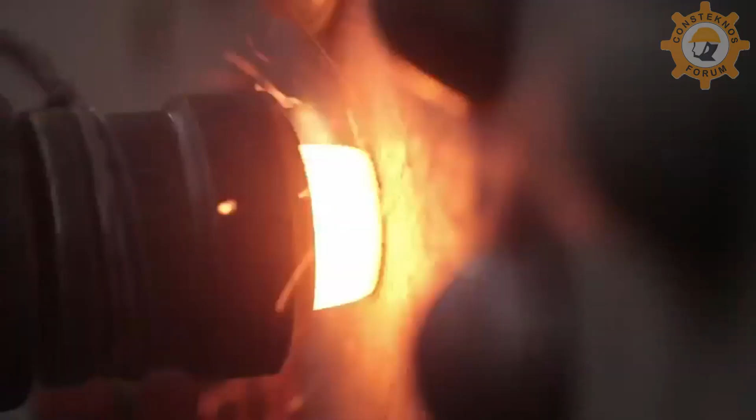But for any change to happen, you need a vision fueled by an ambition. Because everything happens twice, first in the mind and then in the world outside.

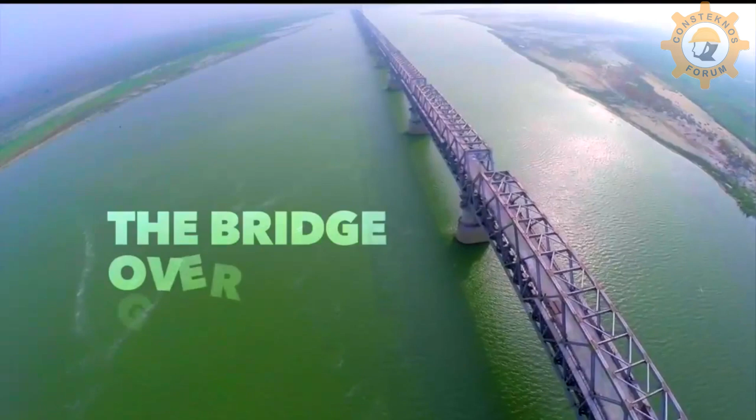The river Ganga, ancient, revered and sacred. Originating from the Himalayas, it reaches the plains, flowing merrily as it meanders its way through the Gangetic plains. By the time it reaches Bihar, the Ganges basin has extended to about 700,000 square kilometers, and the river becomes a white giant that separates the state in two.

With passage of time, this divide has led to an unequal distribution of resources and opportunities in the state of Bihar. For economic potential to be tapped to the fullest, the need to bridge this divide has become critical.

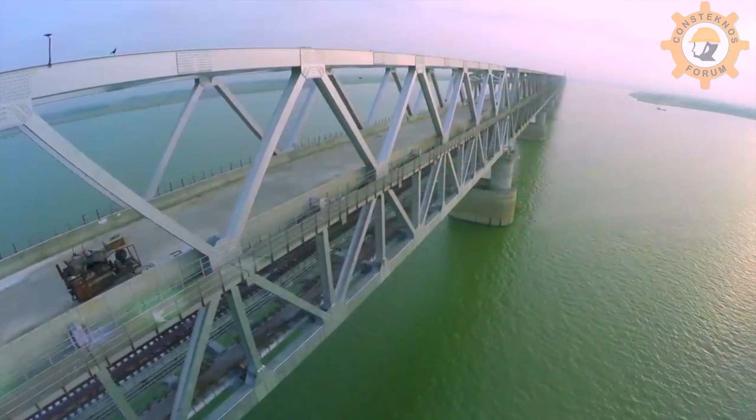IRCON was associated with this bridge in June 2008 when the Ministry of Railways awarded this work to IRCON, and since then there have been various developments over a time span of about 7 years, and now we are seeing the end of the work and commissioning of the railway line, which is going to link the southern part of Bihar across the river Ganga to northern Bihar.

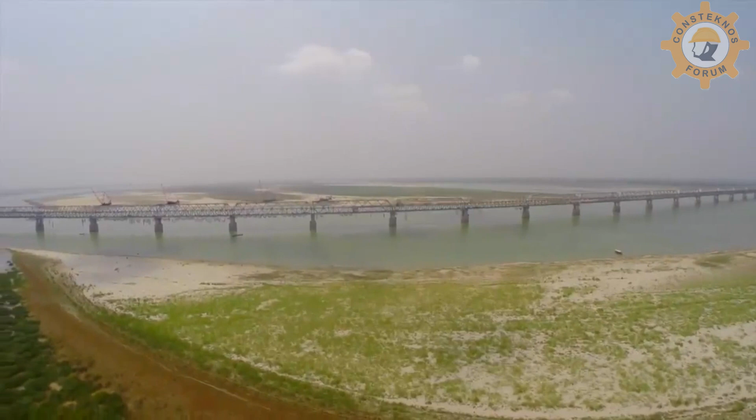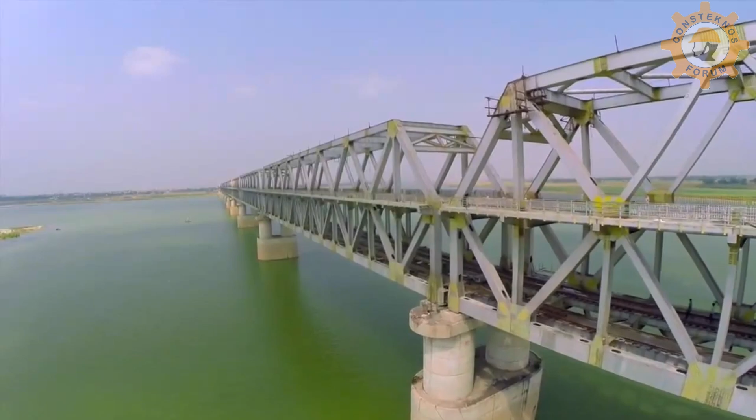36 spans of 123 meters along with 2 shore spans of 64 meters each, with 2,200 tons of steel in each of these spans and 100,000 rivets. This is the longest and the heaviest superstructure on Indian Railways.

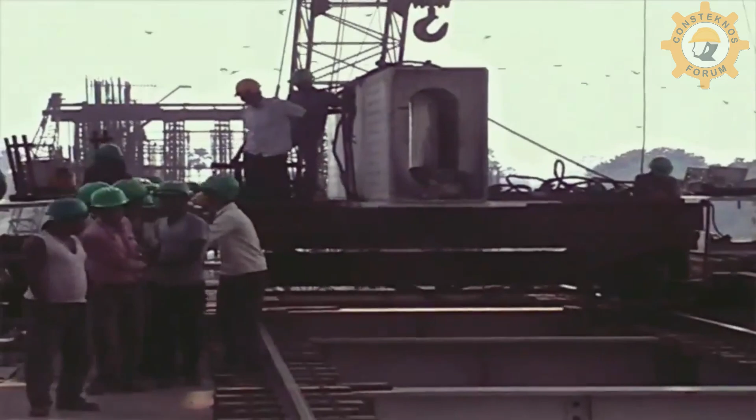The erection of the superstructure started in September 2010. Floodplains were reclaimed with boulders and earth filling to construct the first anchor span. And within a span of 4.5 years, all 36 spans of 80,000 metric tons of steel were mounted over River Ganga. This 4.56 kilometer bridge is Indian Railways' longest truss bridge.

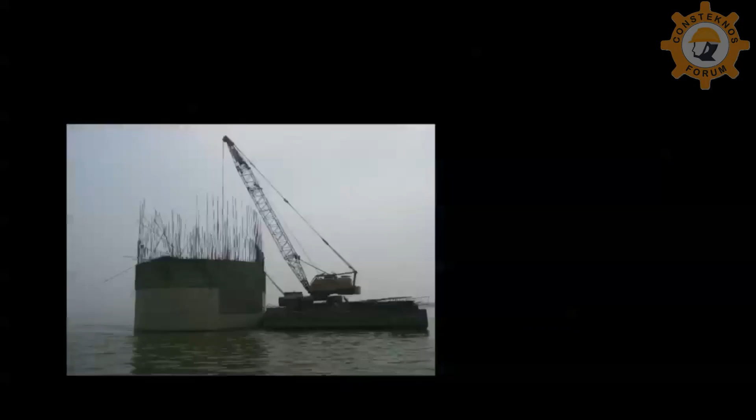The foundation laying had already begun in 2002. It was decided by the ministry to add a roadway above the railway track. By that time, the foundation and the substructure were already complete.

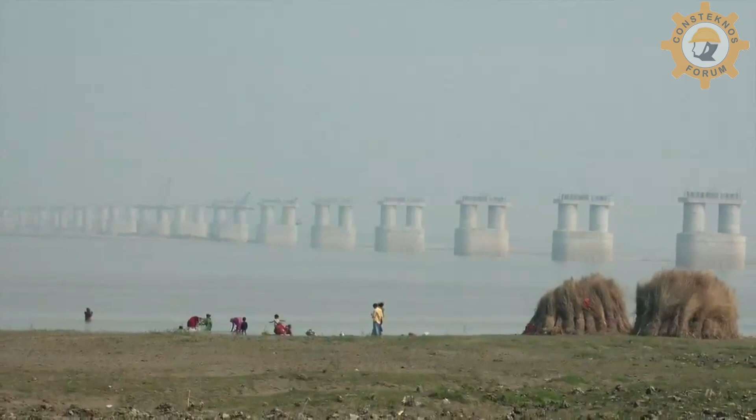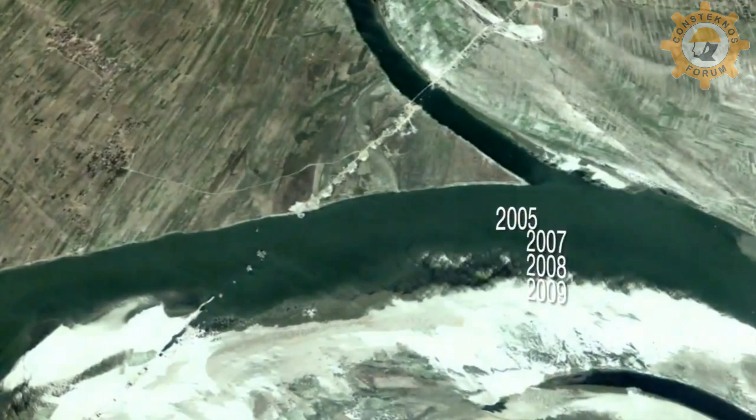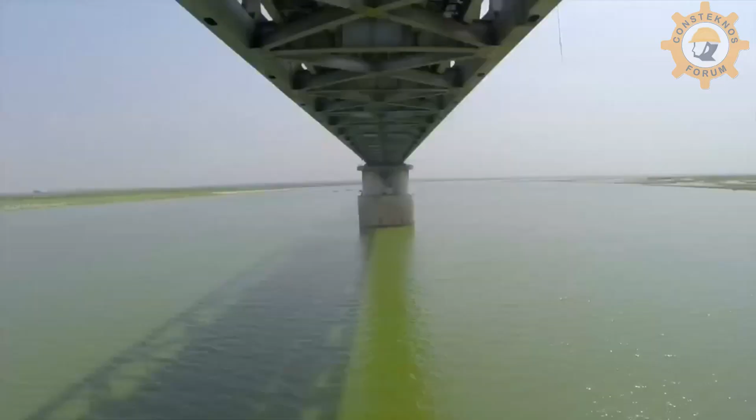This is the foundation portion, which is in the shape of a well, and the well is like this, in the shape of a double D. We have twin circular piers of outer diameter 5.5 meter, having concrete thickness of 0.8 meter. Now the founding level is -8, so the total depth is almost 60.5 meter, which is equivalent to a 17-story building.

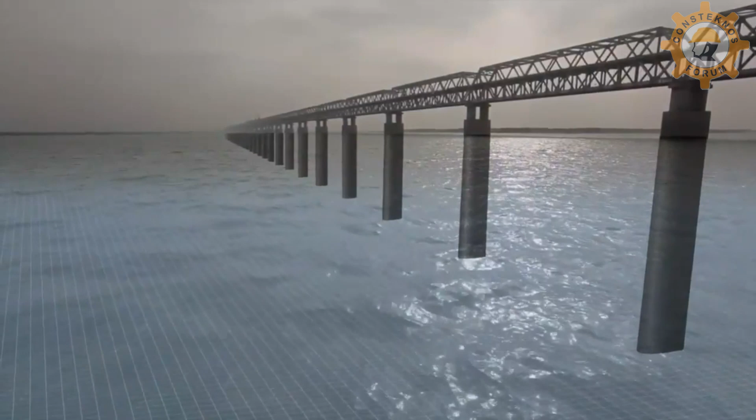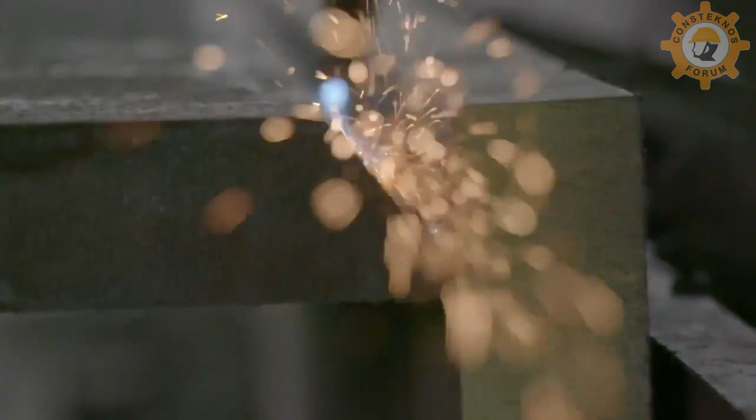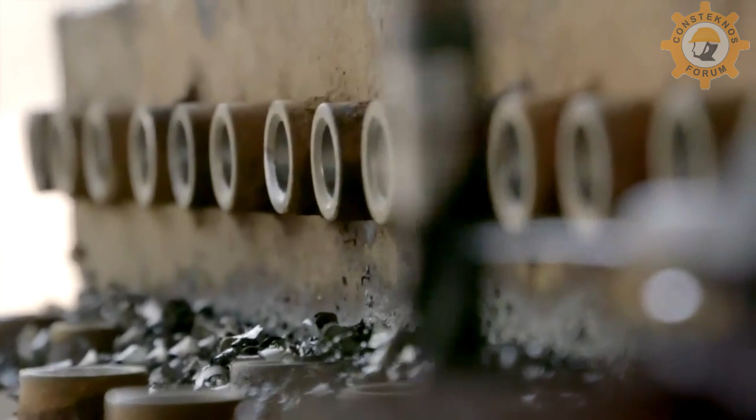To optimize the steel work, we had to go for a higher grade of steel, E450, so that the overall tonnage of the steel could be reduced and the dead weight of the superstructure could be reduced. But nonetheless, we had to use members as thick as 62 millimeters. Fabrication with 2.5-inch steel plate was itself a task. Special radial drills and guide jigs become essential when numerous identical drill holes are needed in large numbers. The drill needs to be precise and absolutely correct in position.

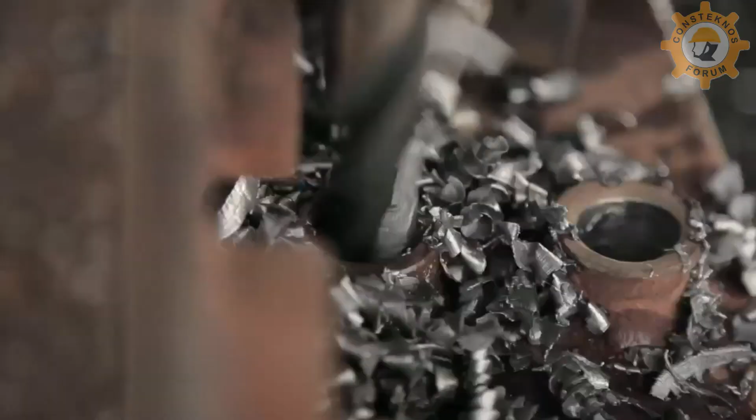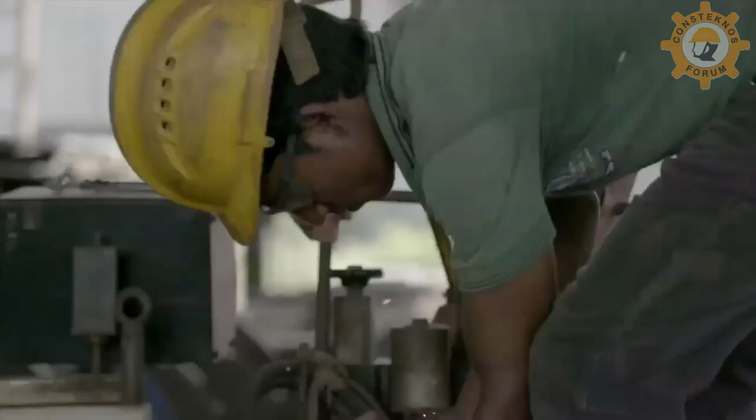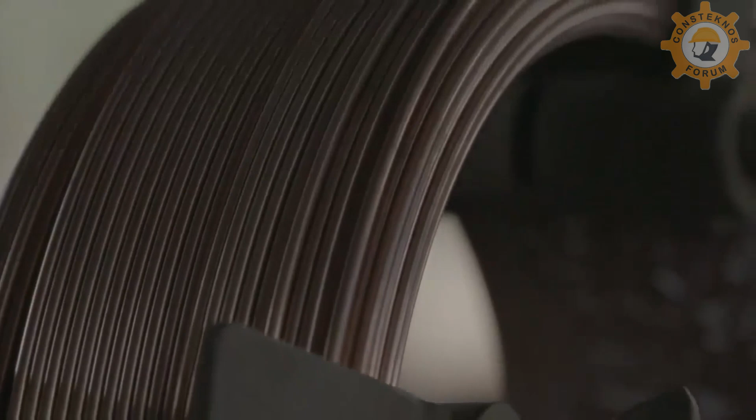Once drilled, these plates will become part of a bigger steel component of the bridge superstructure. Then, these plates are welded to form a member of the steel truss. A special welding technique, submerged arc welding, is being implemented. It involves formation of an arc between a continuously fed bare wire electrode and the workpiece. The process uses a flux to generate protective gases and to add alloying elements to the weld pool. When molten, the flux becomes conductive and provides a current path between the electrode and the workpiece.

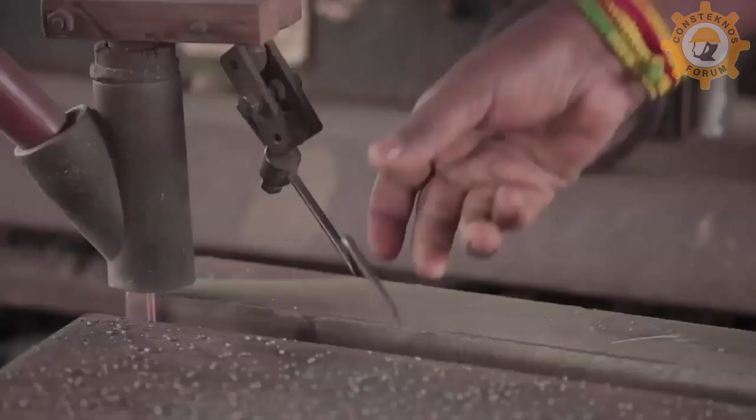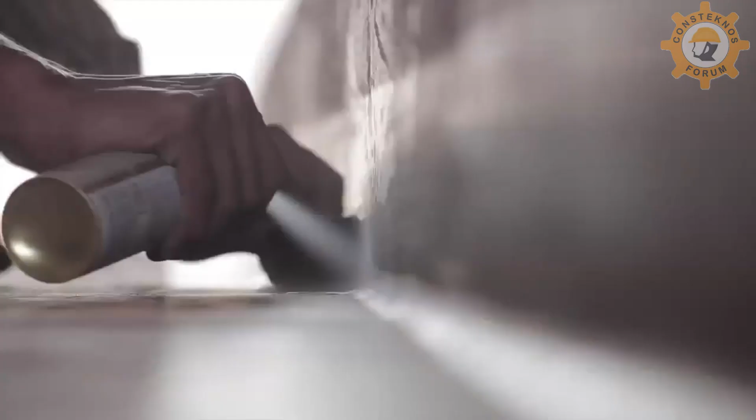The molten weld and the arc zone are submerged under a granular fusible flux consisting of lime, silica, manganese oxide, calcium fluoride, and other compounds. This prevents any atmospheric contamination. Since the operator cannot observe the weld pool, great reliance must be placed on parameter setting and positioning of the filler wire. As the arc is completely covered by the flux layer, heat loss is low. There is no visible arc light, the welding is spatter-free, and there is no need for fume extraction. Once the steel is welded, it is thoroughly checked for perfection by dye-penetrant testing. Here the white color shows the weld is seamless.

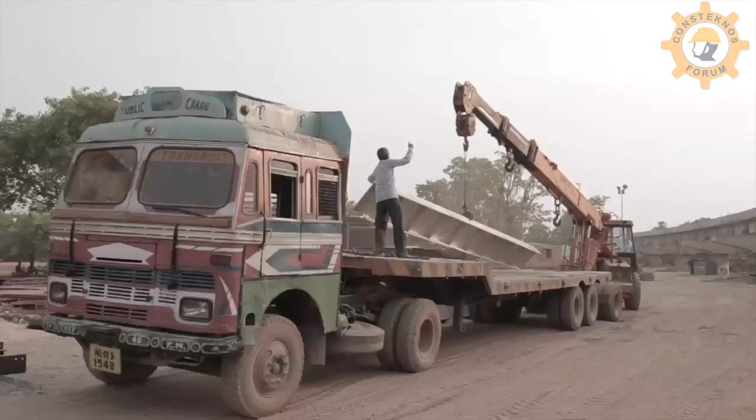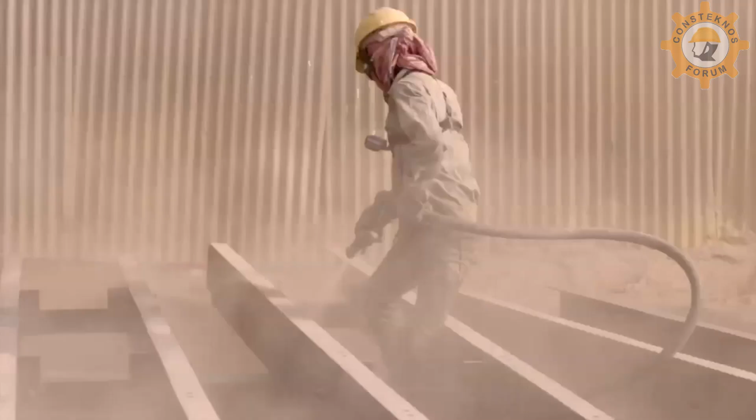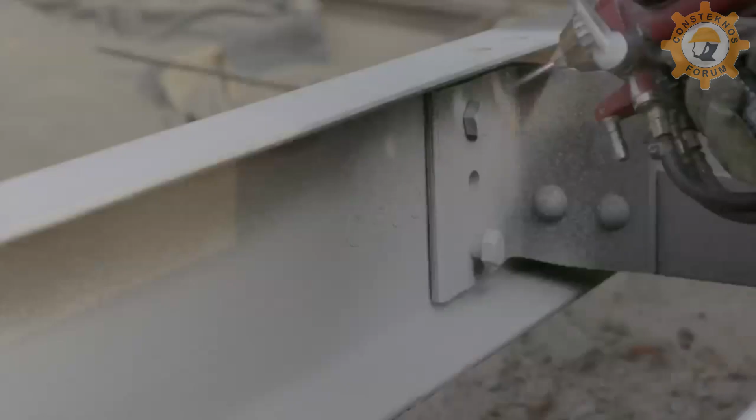The prefabricated steel components are then sandblasted and metallized. Sandblasting involves propelling very fine bits of sand at high velocity to clean the steel surface. Once sandblasted, the steel is metallized with a coat of aluminium. This will provide environment and corrosion protection to the steel for decades.

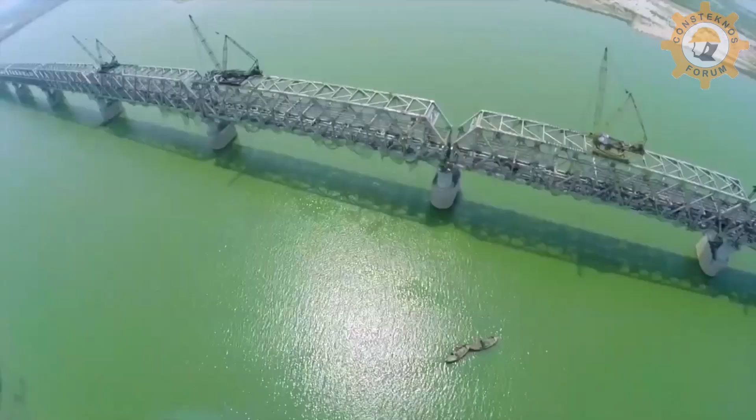The steel truss cantilever bridge was a major engineering breakthrough when first put into practice. It can span distances over 460 meters and can be more efficiently constructed at difficult locations by virtue of using little or no structural reinforcements. The construction begins with one span on ground. This serves as the anchor span for cantilever cranes mounted on top of the steel superstructure.

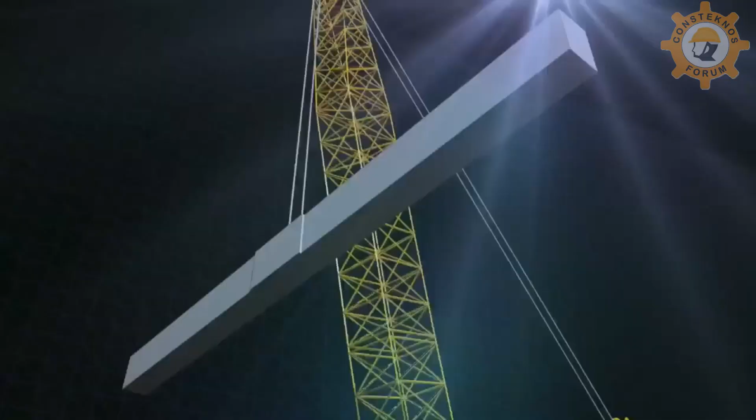Supported by a link member which holds the free end, these cranes build the next span member by member, launching ahead without any other propping from the ground. The cranes move on top, along the truss structure, adding one member at a time, forming an entire span from the free end, and land on the next pier.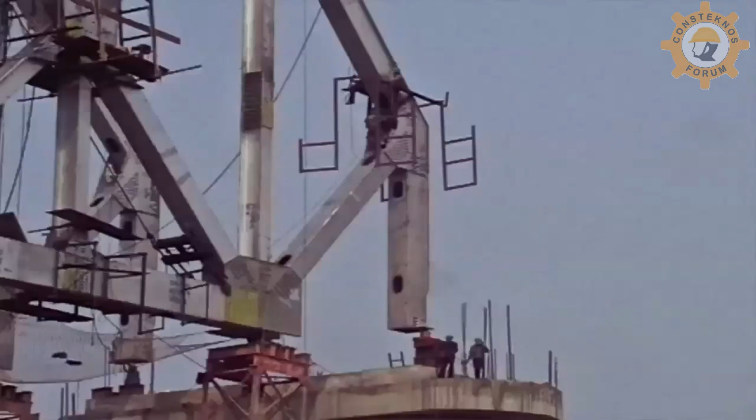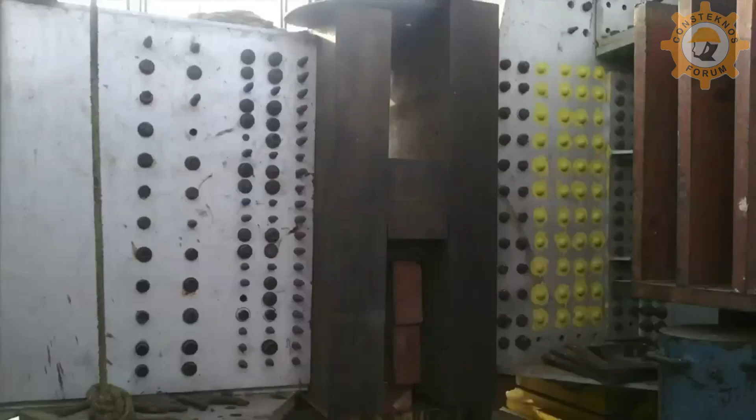Before cantilever launching of a new span, the bottom chord of the new span is blocked for any backward horizontal movement. It is done by inserting a buffer block between the bottom chord of the anchor span and the bottom chord of the new span. The vertical movement of the buffer block is monitored to assess the vertical deflection caused at the far end of the new span being launched.

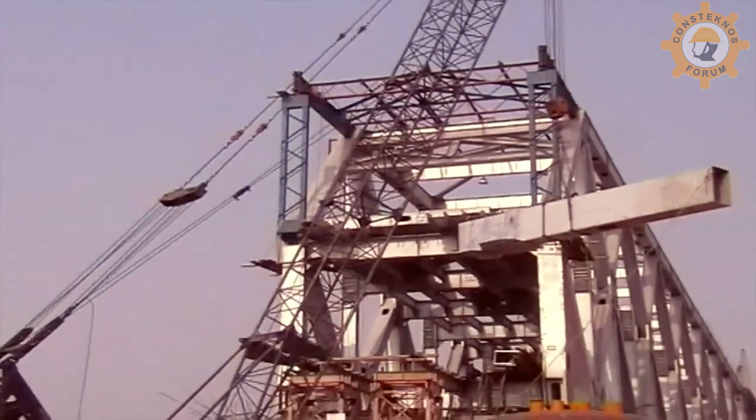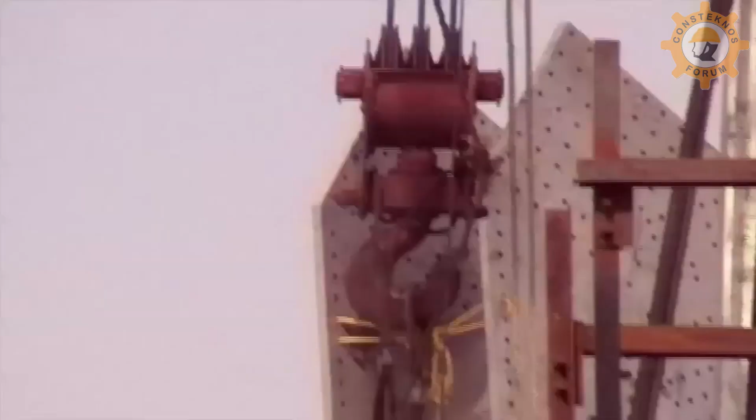For cantilever launching, the fabricated members were lifted to the rail level by ground cranes, then transported on temporary tracks. At the launch end, these members were lifted by cantilever cranes and fixed with drifts and bolts. On one single span of the superstructure, there are over 100,000 rivets.

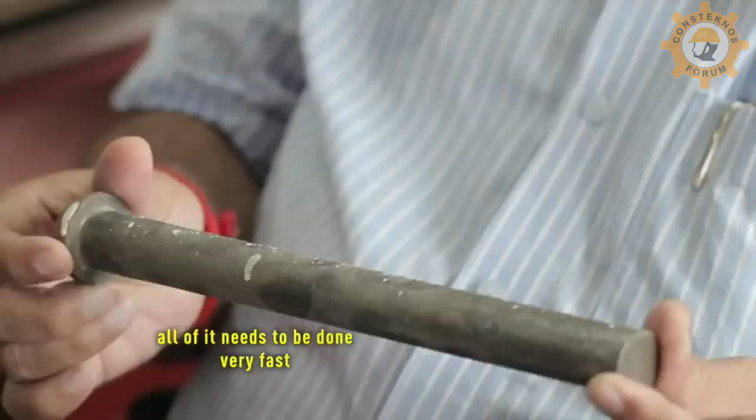A rivet is a permanent mechanical fastener. It is a smooth cylindrical iron shaft with a head on one end. The end opposite to the head is called the tail. It is heated and immediately placed in a drilled hole.

And the red hot tail is then pounded to form a new head. In other words, pounding creates a new head on the other end, resulting in a rivet that once cooled has fixed itself permanently on both ends. These rivets hold the steel components fastened together permanently.

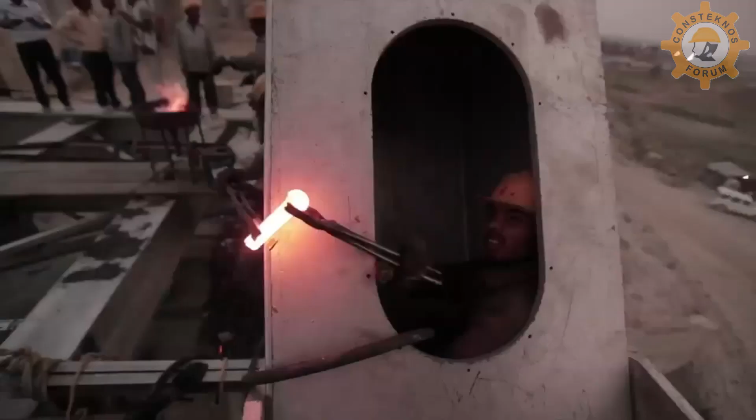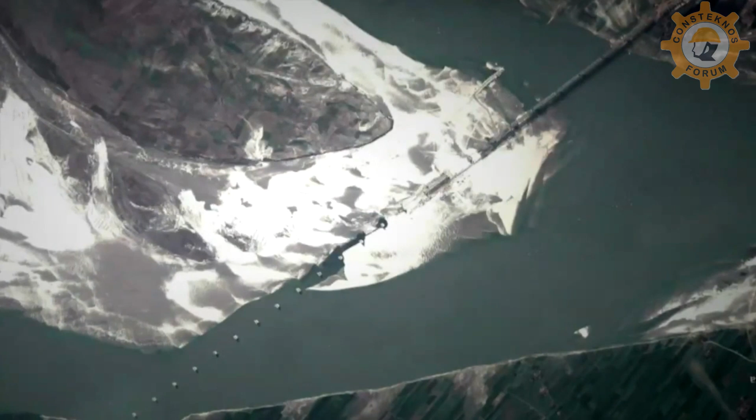In order to accomplish the task more efficiently, the engineers started construction from both sides and had plans to open a third front. But the forces of nature had something else in store for them. This island, before 2013 floods, protruded beyond this 11th span of the bridge up to say 100 meter on the downstream side. And suddenly in the floods of 2013, this got washed out.

It was a very big challenge for us. Then how to continue with our ambitious plan of a third front? And then we thought of a bigger barge. We brought a big barge of 1200 metric ton capacity, which carried material from the shore on the north end to the place of erection, and the entire material was lifted from the cantilever crane right from the barge, and erection was continued.

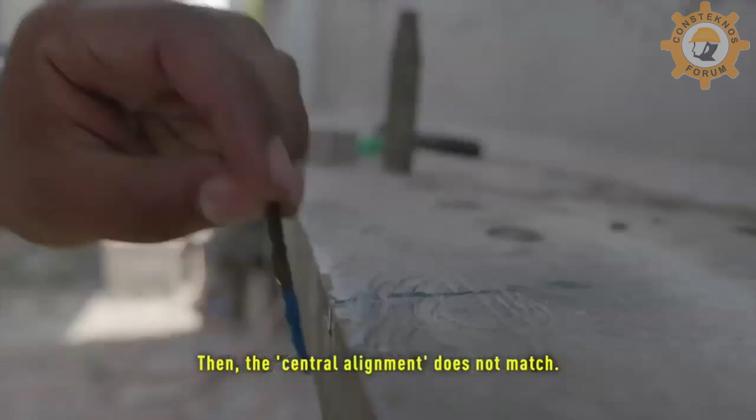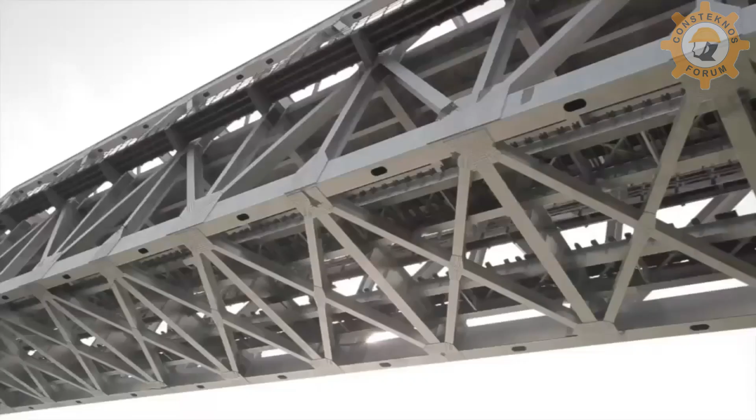And if the alignment of the truss does not match the central alignment of the bridge, the entire 2240 metric ton truss will have to be shifted into alignment.

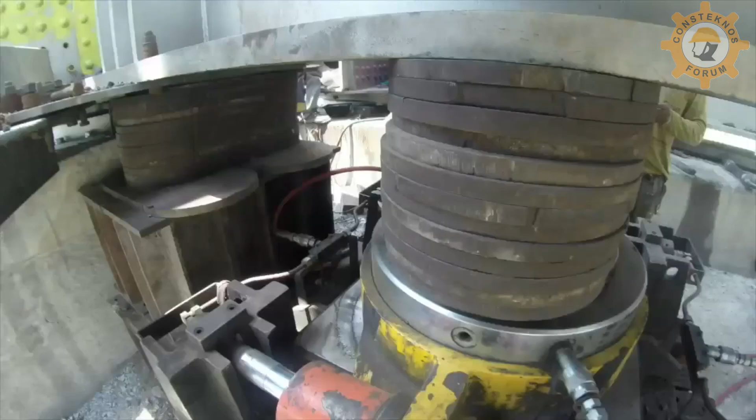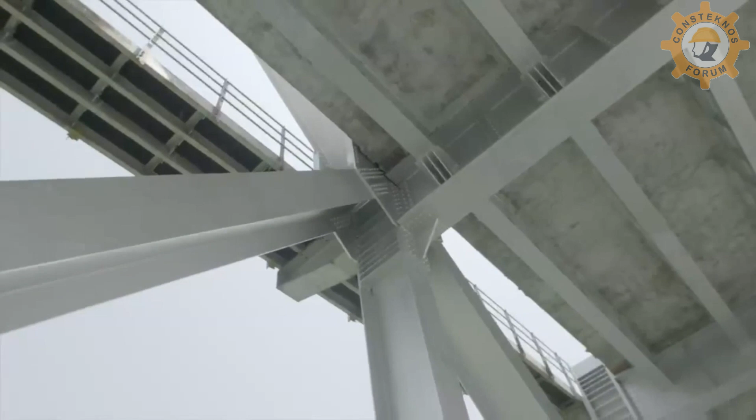To build a road deck on the second level of the steel structure, the engineers had an unprecedented challenge. The concrete casting could have been done by providing traditional support reinforcements from the rail level below. But the engineers had to find a way that would not hinder the railway work and accomplish both tasks simultaneously without affecting the other. Generally, we use props from ground, and using props from ground would have hindered the work.

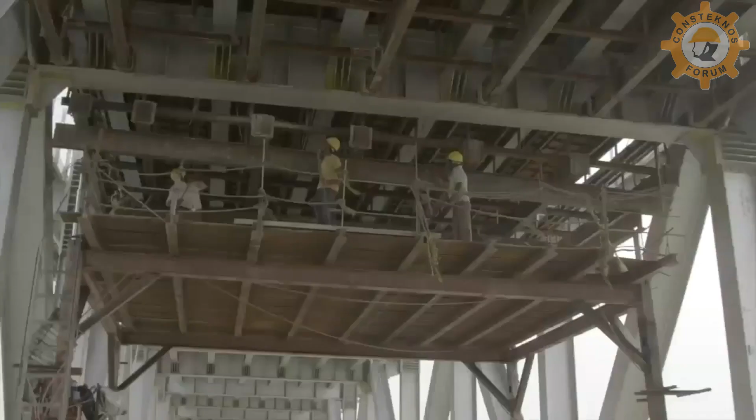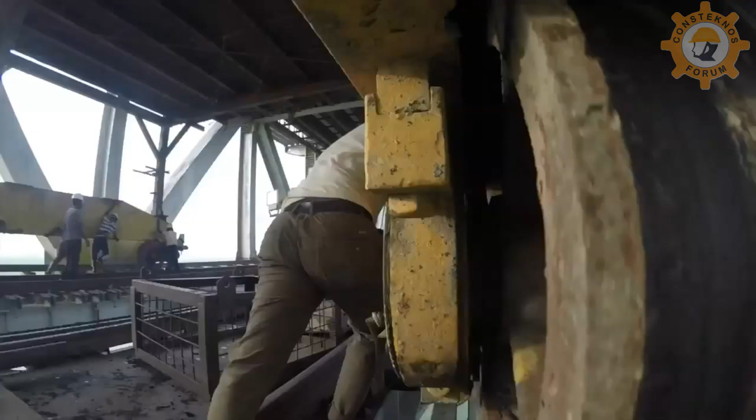So we devised a method which does not use the support system. As you can see here, there is a gantry, and behind me again there is a system which is independent of support from ground. So they developed a gantry that runs on the rails and holds aloft a large steel shutter that provides the support needed for the road construction above.

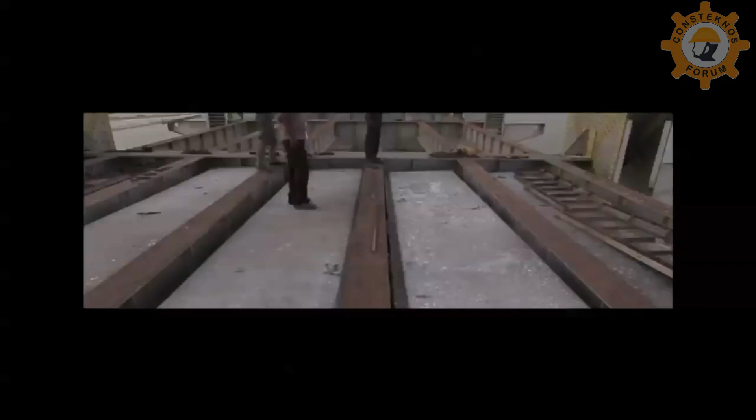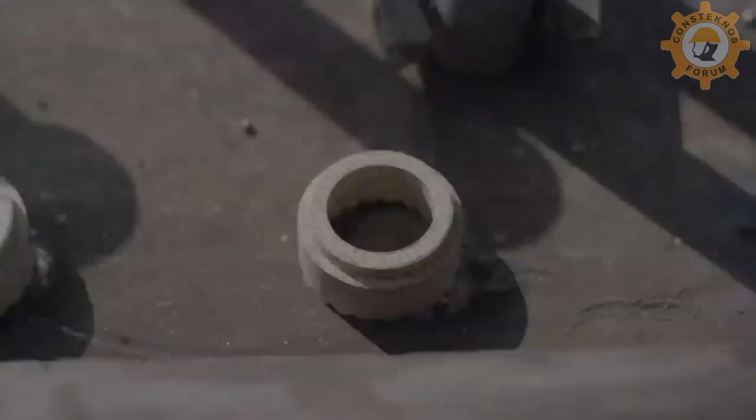On the deck, the shutter is fixed and team is welding shear studs into the steel structure. These shear studs prevent the slip between concrete and steel structure and help achieve a much stronger bond. Shear studs transfer and balance the stress between steel and concrete in a composite structure.

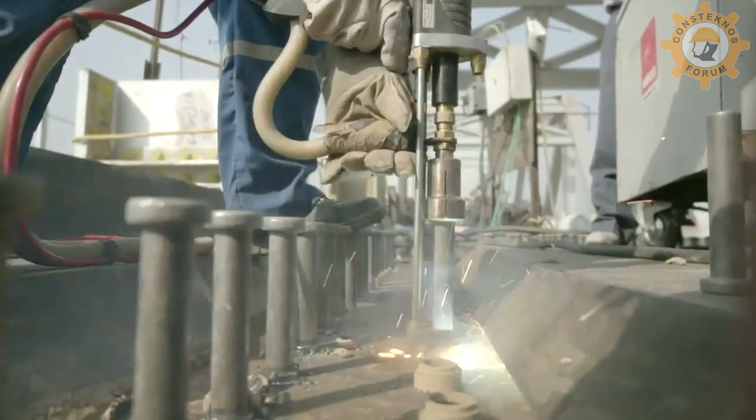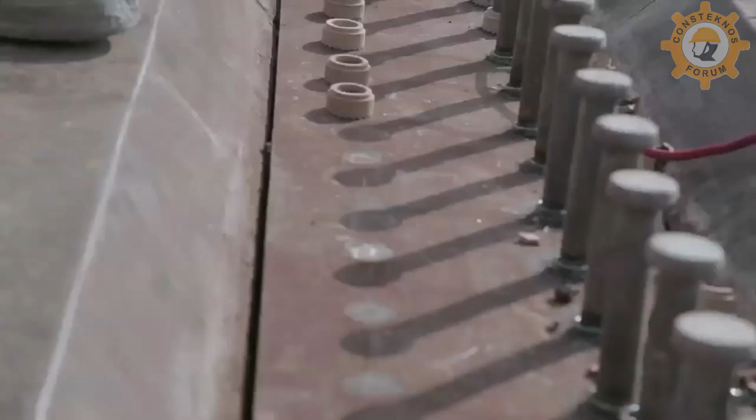Stud location and straightness of alignment of row over the steel cross girder and road stringers is marked with precision and care. Surface around welding location is cleaned by buffing wheel and made free from rust, dust and paint. The stud welding gun uses a type of flux called ferrule, a ceramic ring, which concentrates the heat, prevents oxidation and retains the molten metal in the weld zone. The ring is then broken and removed.

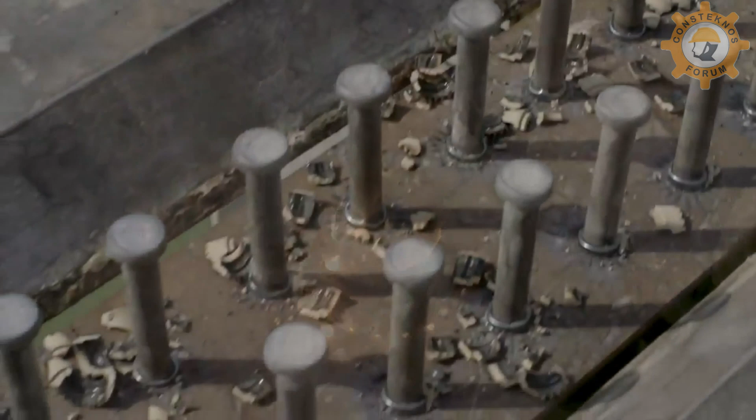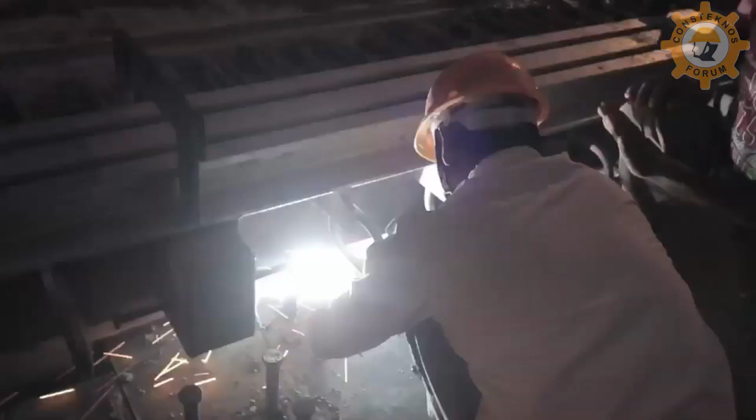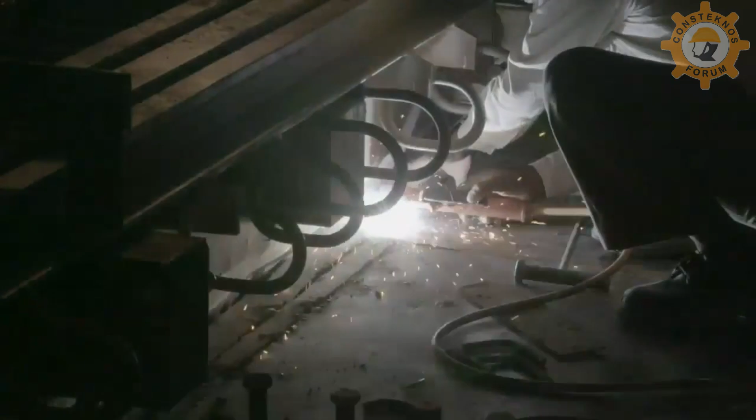An expansion joint is an assembly designed to safely absorb the heat-induced expansion and contraction of construction materials. It absorbs vibrations, it holds parts together and allows movement due to ground settlement or earthquakes. This joint greatly reduces the stress that would otherwise be caused to the main structure.

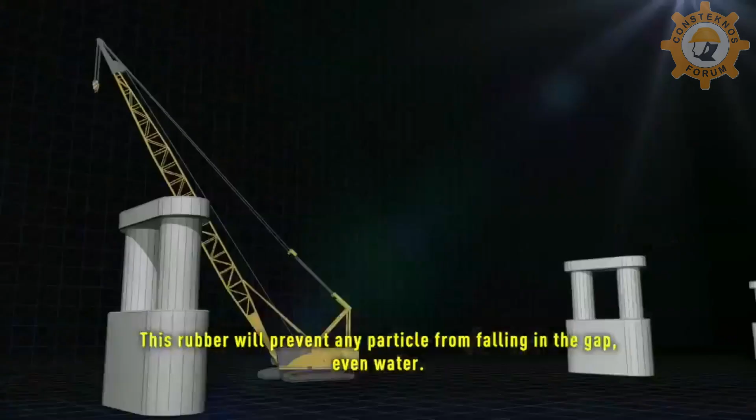The first anchor span was erected on trestles in September 2010, initiating cantilever erection from the southern end.

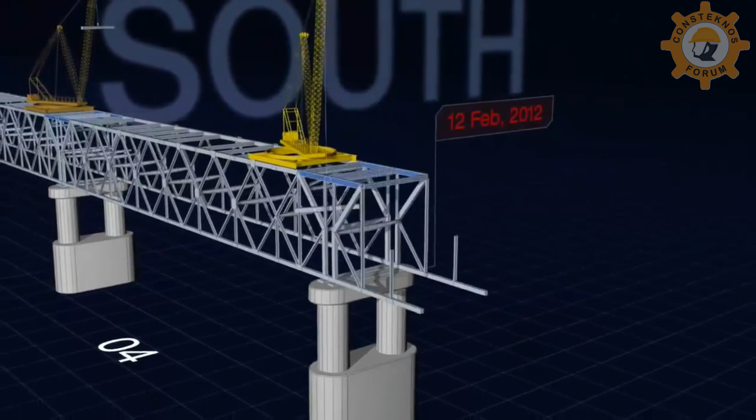While on the north side, the erection began in January 2011. Taking advantage of the dry weather, additional anchor spans were built wherever there was ground support. Even midstream, the span number 27 had a patch of land underneath, adding a third front for the cantilever erection.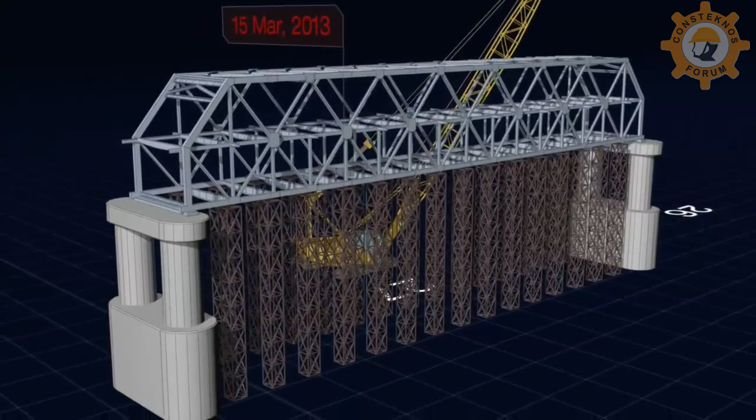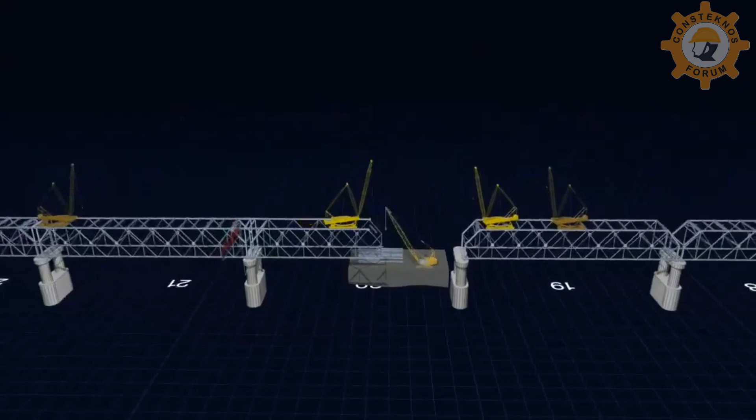But in 2013 floods, the land got washed away, so a floating barge was used to feed the material for midstream cantilever erection. This expedited the progress, and within 1.5 years, the erection of superstructure was complete. On 2nd of January 2015, when a bottom chord member was placed to bridge the last gap, the link between north and south was finally established.

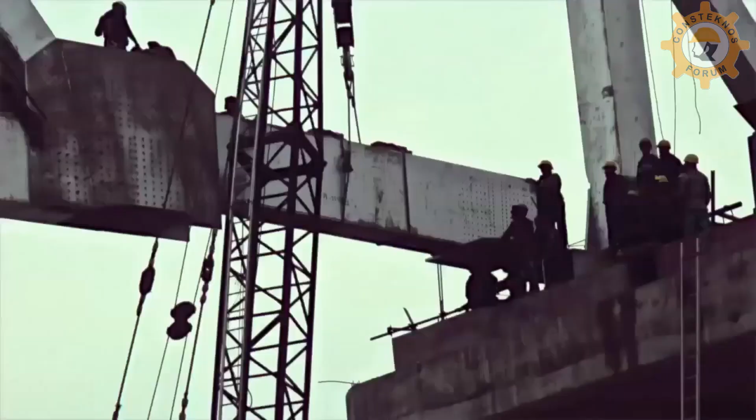Such kind of structures are not built daily or annually or every decade. Such kind of bridge may be a once in a lifetime construction, and I am fortunate that I have been associated with this bridge. Not many engineers will get a chance to be associated with such kind of a mega bridge construction. From technical point of view also, it is a feather in the cap of Indian Railways.

It is the longest rail cum road bridge in the country at 4.5 kilometer. Most of the fabrication is welded, and there is as much as 200 kilometer of welding which has been done for the bridge, and at joints we have provided rivets totaling almost 4 million. So these are all big achievements.

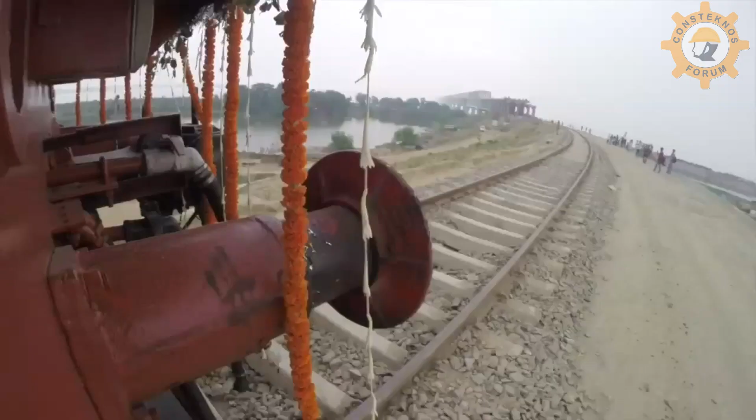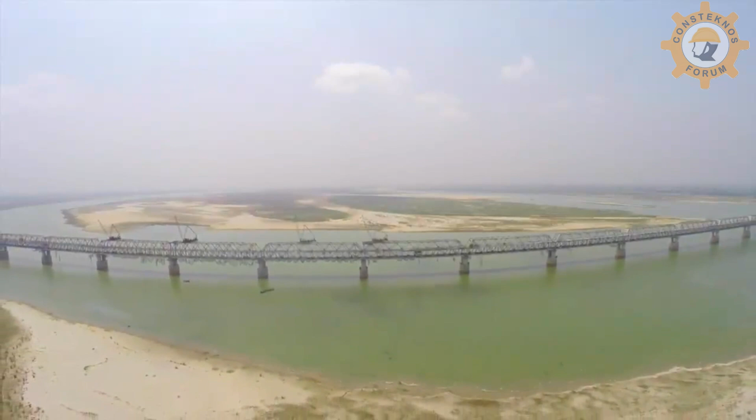Connectivity is the key to economic prosperity. When human resource is mobilized, unprecedented growth can be actualized. Job opportunities, agricultural exchange, tourism, increased productivity and efficiency are some of the immediate gains the bridge will deliver. However, homogeneous growth, decongestion of urban areas, and increased participation of villages to Bihar's economic growth will be the key long-term impact of this initiative.

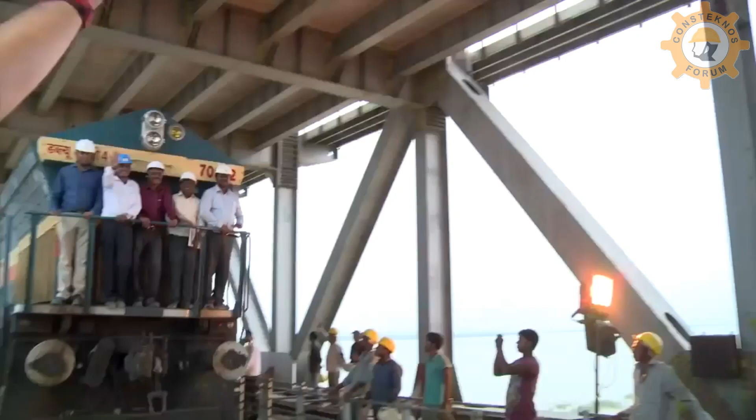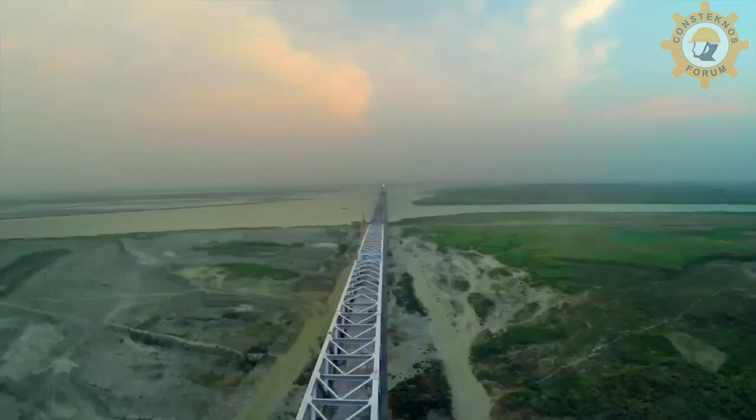Bihar stands on a threshold of a dynamic phase for growth and development. This bridge over Ganges, connecting Patna with Sonpur, will be a turning point for Bihar.